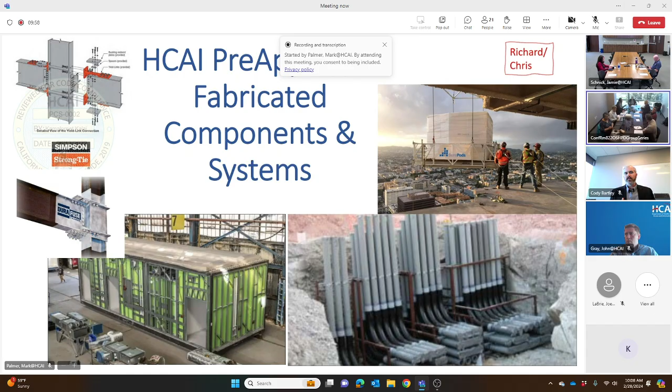Actually, before we get to the TIO, can you pull up the PowerPoint that I sent over, and let's look through that - it will highlight some of the open gaps we still have to go. Thank you. I'm going to go past the parts that we have, and we're just going to focus on the holes, and that's what we need to fill at this point in time.

The HCAI point of view on the offsite prefabrication and pre-approved fabricated components - I believe this part was coming for Richard or Chris. I probably just need to work with you to get a quote on this. Okay, that should go pretty quick.

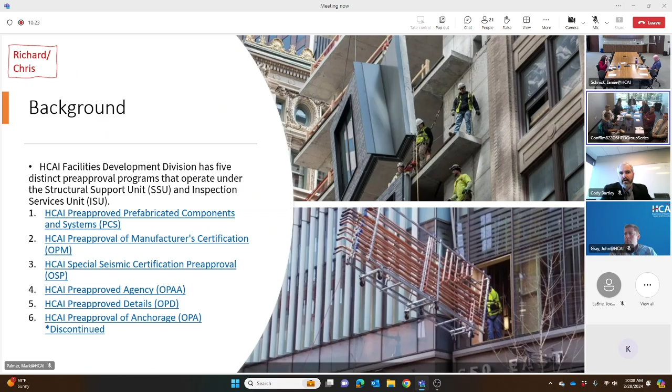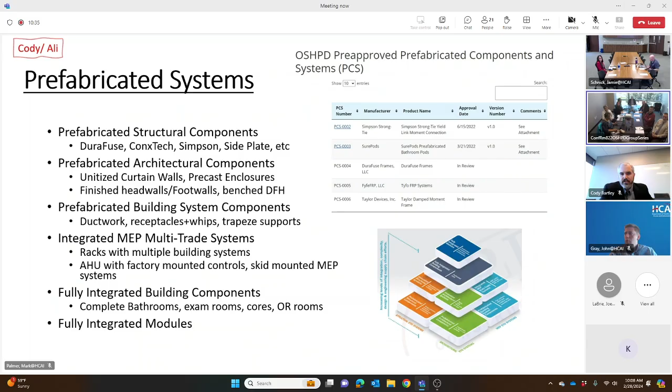We had the architects, the contractor's point of view, the background, stepping through all the different pre-approvals, going through the definitions again, highlighting just where we stand with the 5 PCSs that are currently going through, and highlighting the different aspects of all the different types of prefabrications - pretty vast.

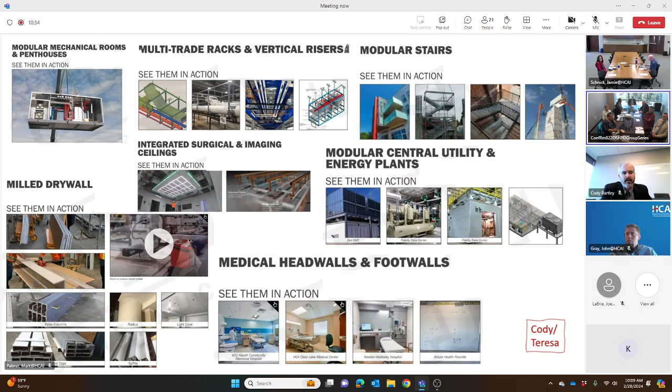Giving some examples of this. This is supposed to entice some people and just create some ideas.

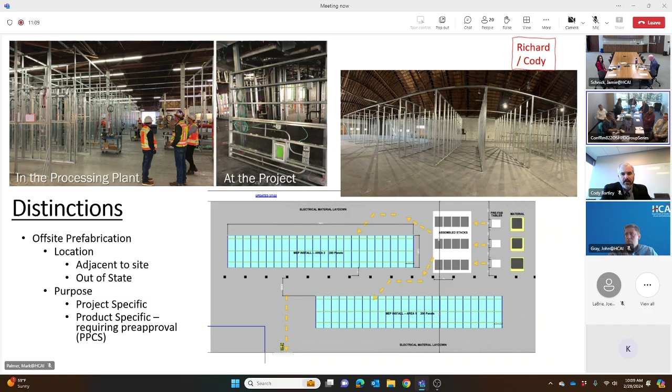Distinctions between off-site fabrication, being adjacent to the site or out of state - this is where we're going to hit on those notes. Richard and myself, I think we're taking this one. We had some pretty good pictures and examples of off-site fabrication warehouses and just kind of what goes into setting that up.

What is the purpose of the pre-approval program? I think this is where we're hitting on that. Reza, I had you speaking to this slide.

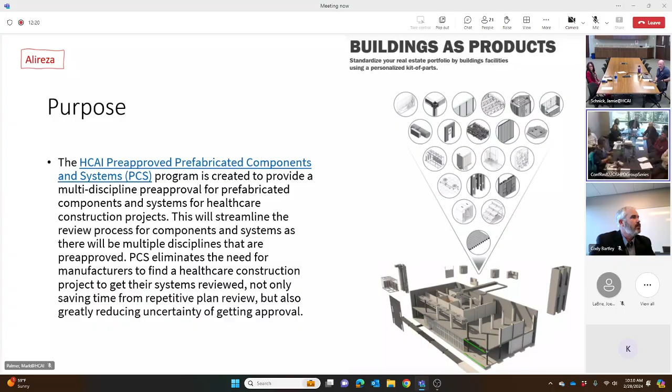This is the purpose, as far as like when we get to the actual putting on the webinar. I've got, if you're looking at the slides here, whoever I have in the box at the top of the slide - that's kind of whose slide that is. That will be the speaker.

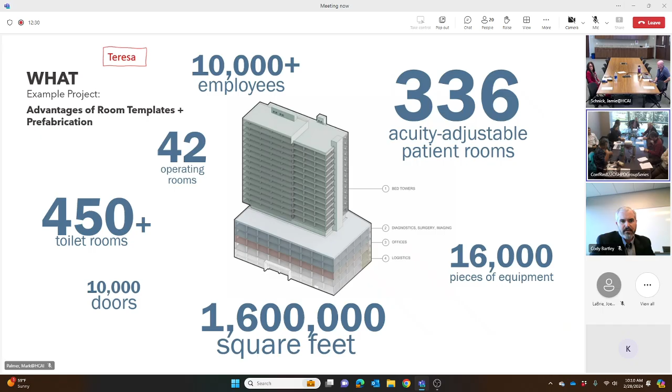Why offsite prefabrication? This is highlighting some of the advantages of it. Then we're getting into some of the case studies here. Teresa had a run at it.

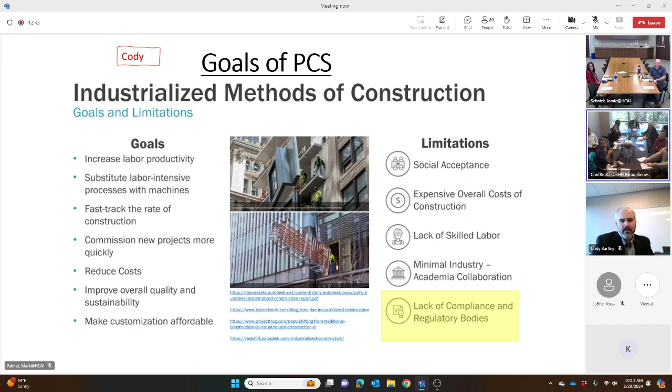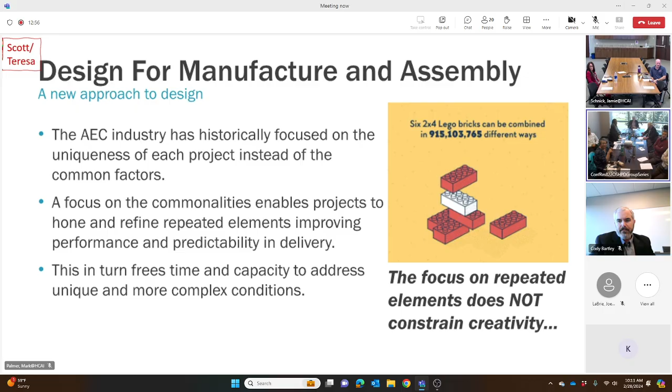Goals of the PCSs. Scott and Teresa, designing for manufacturing and assembly, speaking on the design component, how these get integrated here. Timing to integrate it is in the process.

So once we have a PCS, I think we just want to take a moment, pause, and tell the group that from this PCS, you're taking the entire submittal and putting that in the documents. Is this for the actual project approval of it? Yes, for the actual project approval.

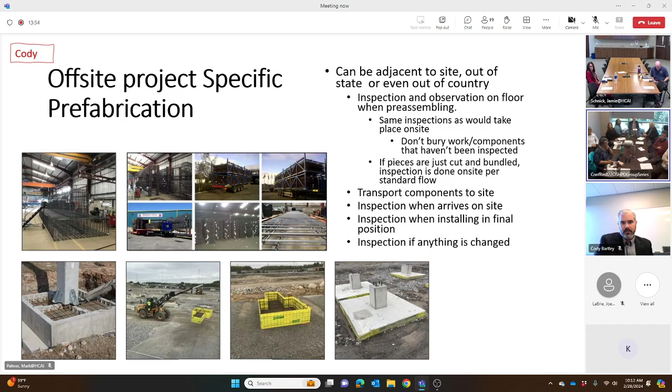Project-specific prefabrication. Examples - who inspects offsite? So this is where we get into the inspection aspect of it.

But I think what we're missing here is the draft TIO, and Belinda has been working on one. But I believe it's becoming more project-specific than template. Yeah, I did talk to Belinda about it - basically, they've scaled down what they're doing for prefabrication, so I don't think it's going to help us as an example.

So I'm looking to Joe at ISU to help put one together that's a little more complex, so that we can give a good example of it. Best way to handle that, or move it - should I contact Joe on that front? Joe's on the call. So Joe's volunteering.

So Richard, this is Scott Mackey, member of the committee. So you're saying we've got a simple TIO form now for prefab, and you're waiting for a more complicated one?

Yeah, well, they scaled it down so much from what they're doing, it's not going to really show a whole lot. Basically, they're just doing very basic items and very little assembly offsite.

This is Chris. It's not that we want a simple one. We want something that gives - I'll use the word complete - picture of how a TIO of this nature should address all the various items that need to be on it, rather than just the specificity we have in this particular project. Yeah, we're getting down to like one item on this one, which I don't think would be a good representation of teaching people how to do a TIO with offsite fabrication.

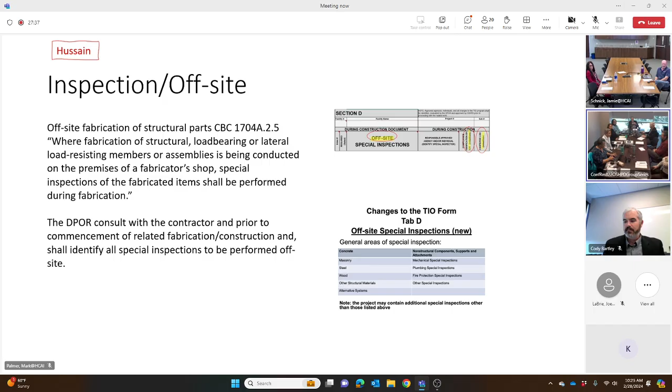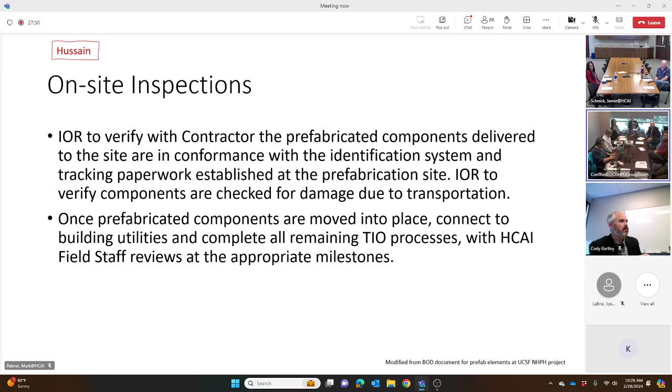Okay, I like it. So we do the summary slide, we talk about, go in depth to each of the inspection locations. Then we put the TIO probably at the back of that section and walk through an example of it. What happens if something changes? And then we get into the examples. I think we're in the home stretch of this one.

One of the items, I don't know if we're going to do it in this presentation, it'll require a separate presentation, or there are two different seminars. It's pre-assembling components. The example we have today is UCSF, there's no room on the site. So what they're going to do is pre-assemble the systems, deliver them on site, and erect it in place. So it's a form of prefabrication, and I think we're going to see more and more of this as sites become more restricted as far as staging.

So do we include it here, or do we have a different seminar? That's what I need to add, the different types, and go into the different variations of this. So I need to expand on that, because one is a complete system versus the other one. If we have examples of everything, I'm familiar with a few, and we actually have a good set of drawings of how they are chopping things up, so you can see how. Let's take a look at that. That's why we added this slide for the different types, I want to address, because not all of these look the same.

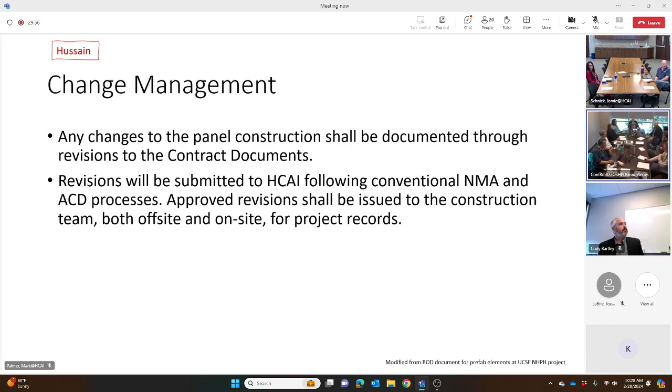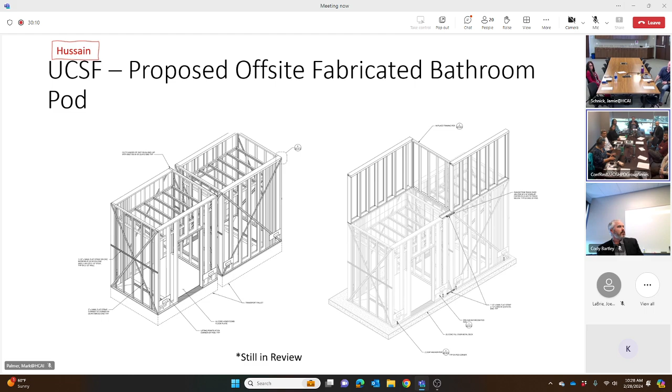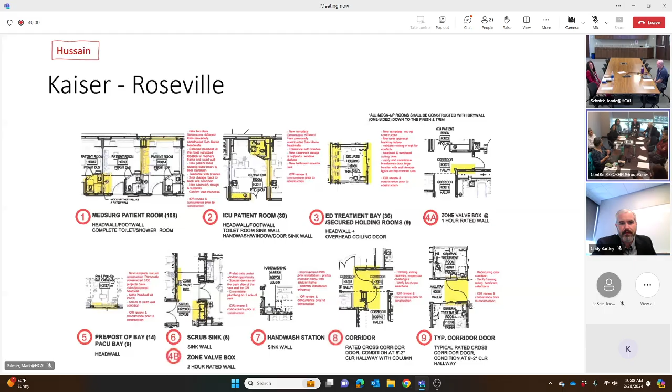And there's like 85 different fonts. Right, well that was the comment you made, that this is a rough draft, and it's nice that you have somebody in marketing who can address it.

Yeah, but we're just getting all the bullet points and pictures to support the story, and then I have some support—sorry, I missed that part. Formatting's not my forte, we'll take care of it.

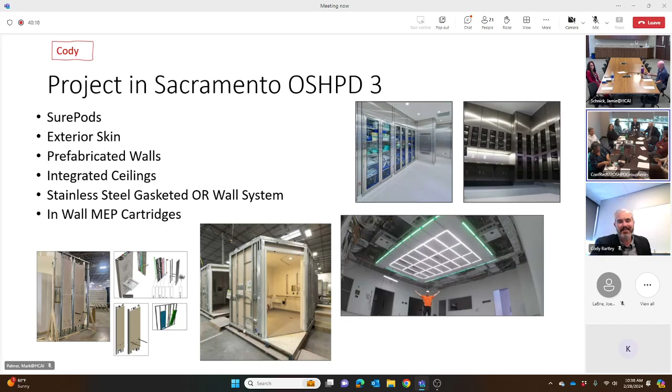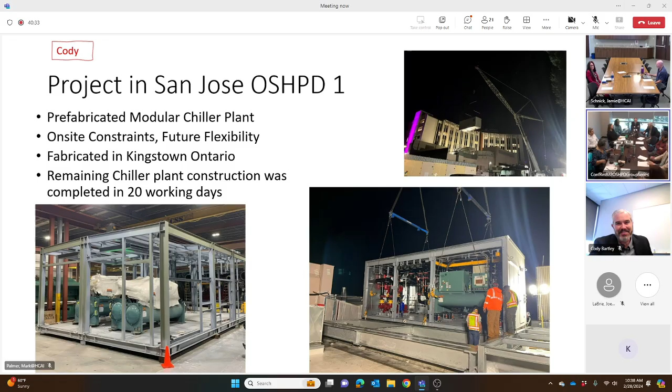And see, this is Cody, so he's starting to take offense—rough around the edges. Okay, he knows me, he knows I want things to look a certain way. Oh, Mika already commented on this too—she was very disappointed I was presenting it in this fashion.

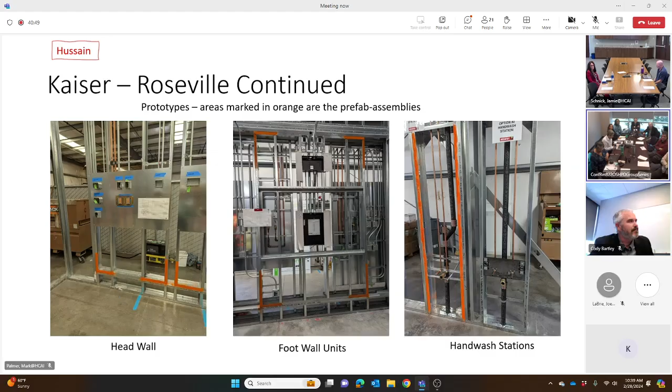Okay, so Kaiser Roseville, we talked about this. Again, some of those bullets could be updated—I think they're doing the prefab in San Diego now. Not that that really matters on the content, but I need to collect some more on Kaiser San Marcos.

We have a lot of stuff on that. The team was going through the close out there and they were a little safeguarded at the time, so I'm not surprised. I'm still working on getting that stuff.

The ask, right, this is what we're leaving the team with—as far as, we're encouraging you to go explore more options. There are benefits to this, minimizing disruption. That's what we're selling.

With the examples that we've seen, different items come up, such as prefab versus pre-assembled. If that unit is adjacent to a rated wall, typically we've seen that rated wall finished first, as opposed to having to try to have that rated assembly within the unit. So you just put it in place and the wall's already there. That's one way that we've seen it.

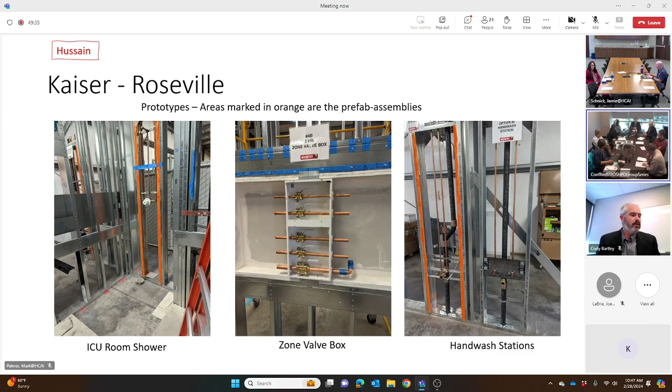Okay, so I think that wraps up section 3 here. Section 4, I jumped the gun on a little bit, but let's discuss next steps to finalize this webinar. Let's put a goalpost, 2 weeks, to have the missing components that we've discussed today put into the PowerPoint here.

Veronica, do you know the next Education and Outreach Committee meeting coming up? I mentioned it here, actually I did. And where it lives on SharePoint will be sent out by HCAI staff, right.

That email, yeah, we'll make it May 22nd. So that's a little bit far out. I think we're going to need another one of these subcommittee meetings, if we need to.

There's a lot of brain power in the room, but I appreciate all your guys' attention here, and it really drives home the importance of this.

Well, it will set the stage, so that's why I think the project has to be as complete as possible and as informative as possible. So I'd rather take some more time to prepare rather than having questions afterwards. It doesn't mean that we're not going to have questions afterwards, but at least we will have a finished product.